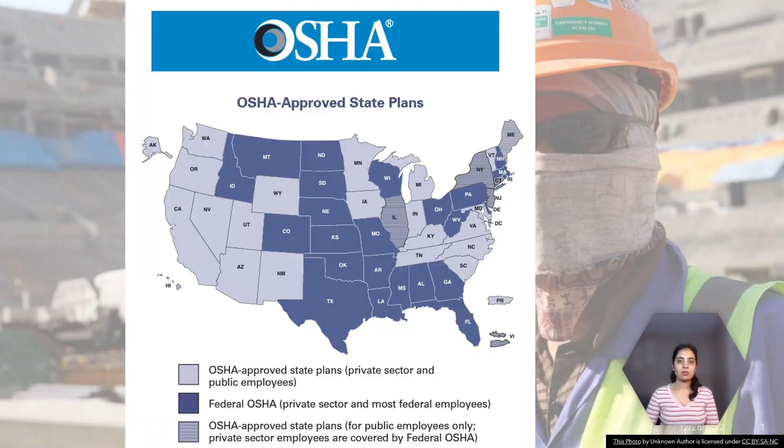In the previous video, we have seen important definitions in OSHA. In this video, we will see all the standards required for steel erection. So, let's watch today's video. OSHA safety regulations for steel erection, from the Detailing for Steel Construction manual by AISC and NISD, chapter 2, page numbers 2-12 to 2-17.

Today's topics: scope, tripping hazards, roof and floor holes and openings, column anchor rods, minimum erection bolts, double connections, column splice strength, column splice locations, perimeter safety cable attachments, joist stabilizer plates at column and joist.

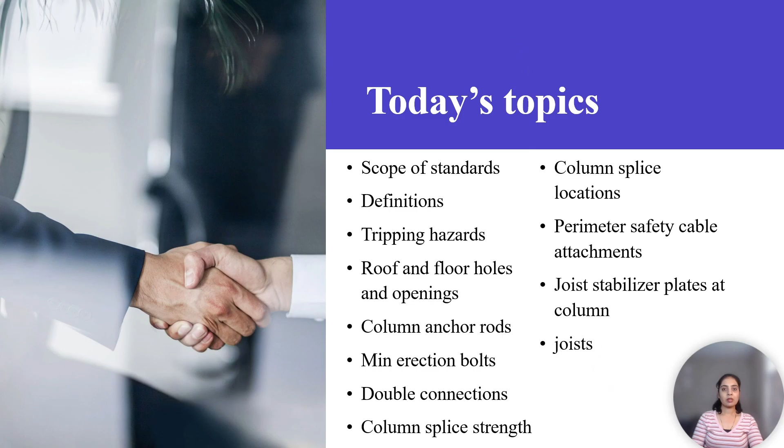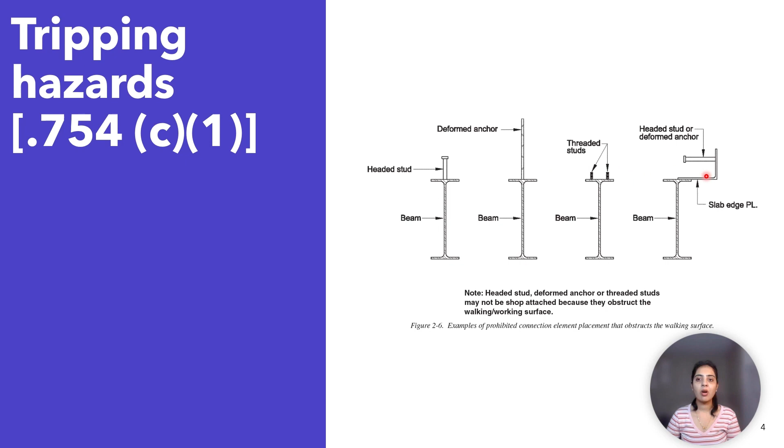The shop placement of shear connectors, weldable reinforcing bars, deformed anchors or threaded studs is prohibited when they obstruct the walking surfaces of beams or joists, as shown in the figure. The shop placement of threaded studs on column cap plates to receive stud joists, deformed bars on column webs, or even shear studs on beam or column webs is not prohibited, since these are not walking or working surfaces.

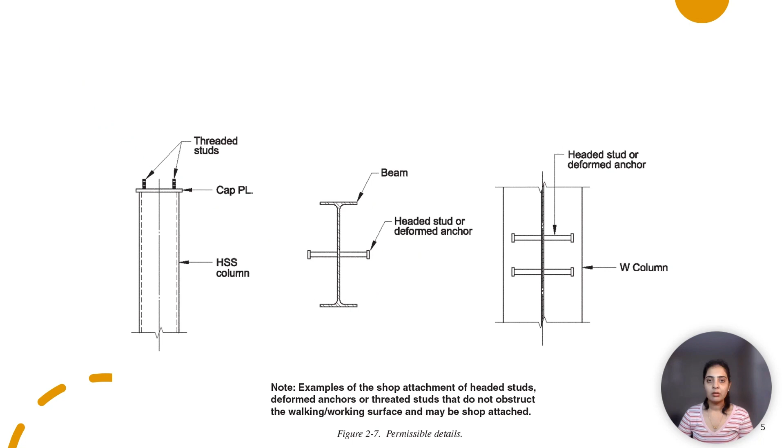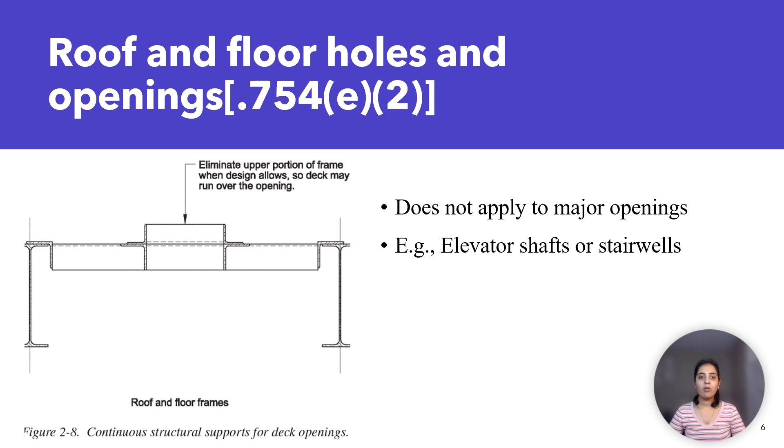Where design constraints and constructability allow, the structural supports for deck openings are to be fabricated so that decking runs continuously over the opening, as shown in the figure. This does not apply to major openings such as elevator shafts or stairwells. Other deck openings are not to be cut until the opening is needed.

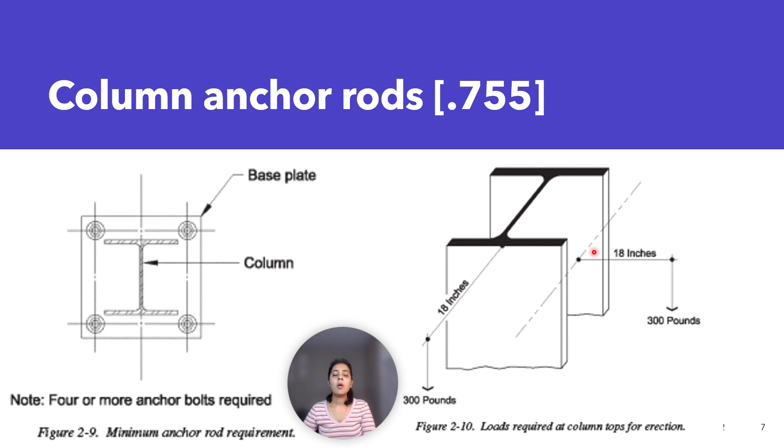Columns should have a minimum of 4 anchor bolts, and these anchor rods and the column foundation should be capable of supporting 300 lb of load at the column top located 18 inches from the face of the column flange, from a plane at the tips of the column flange, except for posts. Posts are not required to have 4 anchor rods. The structural engineer of record must design a column base plate and supporting foundation to accept the 4 anchor rods.

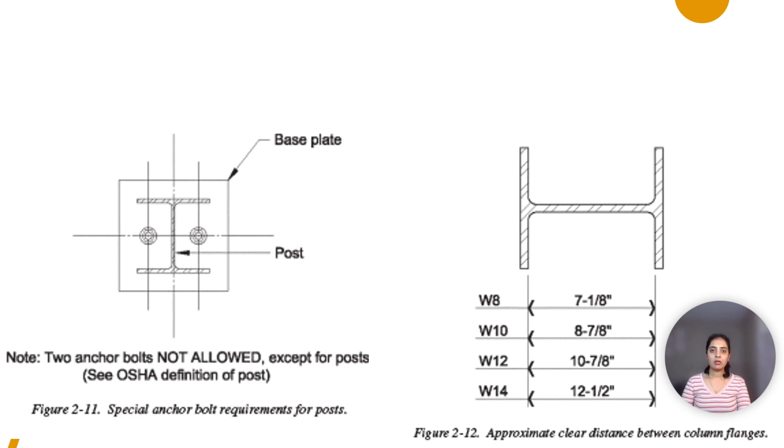In the erection of all columns, the erector must evaluate the job site erection conditions and factors such as wind, when the columns will be tied in, etc., and determine the necessity for guying or bracing.

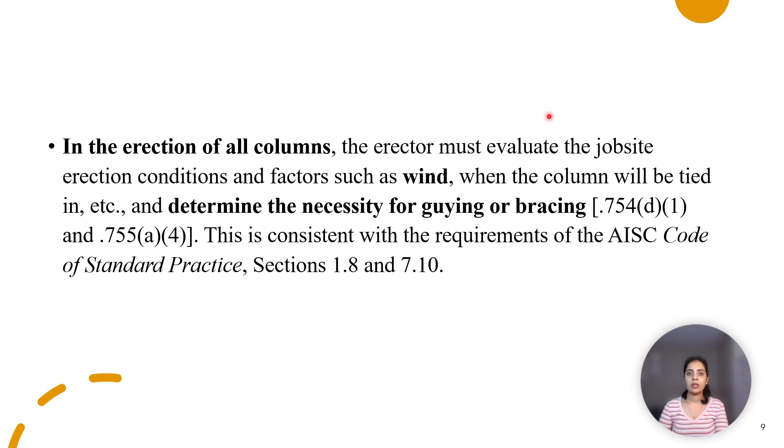Minimum erection bolts. The requirements given in the regulations are the minimum number of bolts to be used during erection to support a member until the crane's load line is released. Two bolts in each connection are the minimum to connect solid web members, and one bolt is the minimum for solid web bracing members, or the equivalent as specified by the project structural engineer of record.

The initial minimum bolts are to be the same size and strength as shown in the erection drawings. The erector is required to maintain the structural stability at all times during the erection process, and the determination of the number of bolts required to temporarily support members is a responsibility of the erector.

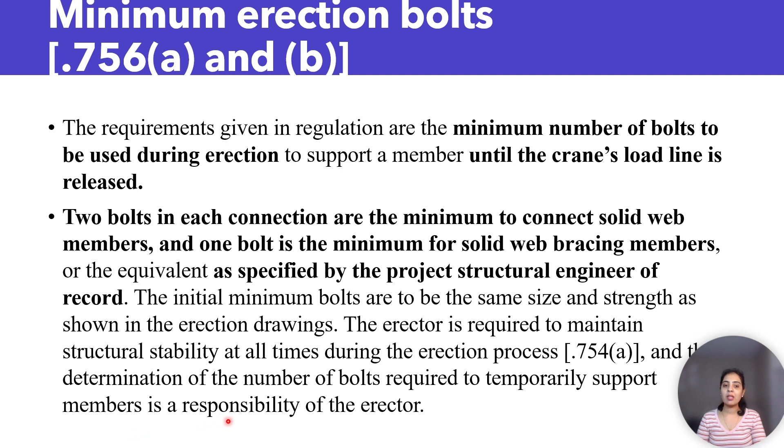Double connections. Only double connections of beams to column webs or to the webs of the girders over columns in the case of cantilevered construction are regulated. Not such connections at locations away from the columns, this boxes the bay with strut beams.

The rule is based on the fact that an erector commonly sits on the beam on the first side of the double connection, while the beam on the other side is connected in these regulated instances. If the connection gets away from the erector, beam and column collapse can occur and the erector may fall.

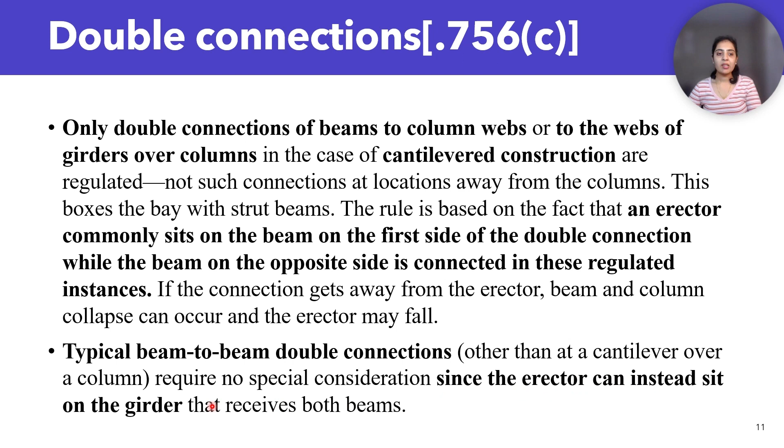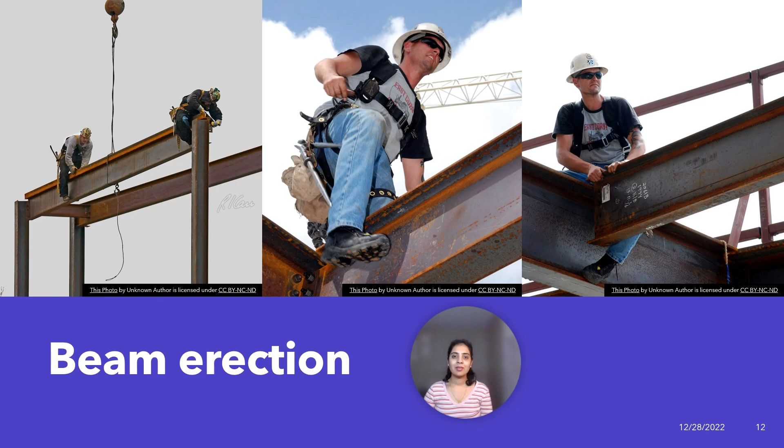Typical beam-to-beam double connections, other than at a cantilever over a column, require no special consideration, since the erector can instead sit on the girder that receives both beams. These are some images for beam erection. At column conditions, there are many ways to facilitate safe double connections.

The staggering of end angles on each side of the column web, single staggered, as shown in figure 2.13, may not stabilize the beam's top flange unless metal deck is present, and the angles may be better staggered on each side of the beam web, that is double staggered, as shown in figure 2.14.

So in this figure 2.13, this is the column web, this is the beam. This beam is erected first and this beam is erected second, and these are the staggered double connections on each side of the column web. So this is single stagger.

In figure 2.14, this is the angle on the far side of the column web held down one hole or clipped, and this is the angle on the near side of the column web held down one hole or clipped. This is the double connection staggered on each side of each beam web.

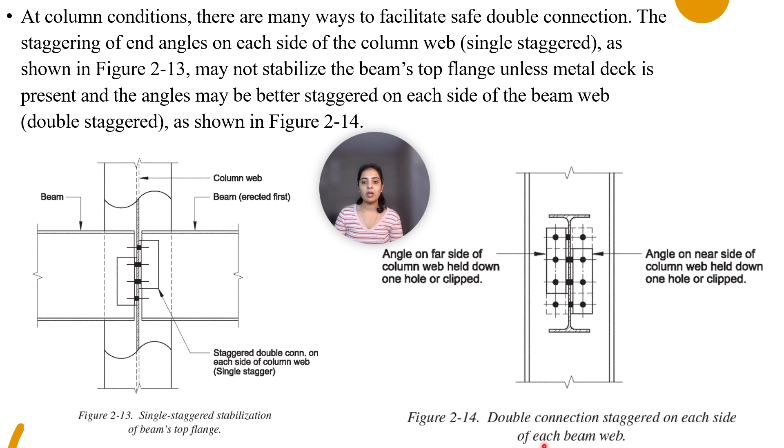When seats are used, the beam must have a positive connection to the seat while the second member is erected. The figure in the OSHA Standards Appendix H shows clipped plates where the end plates are used as shear connections. So in this connection, this is a double connection with the temporary bolted erection seat.

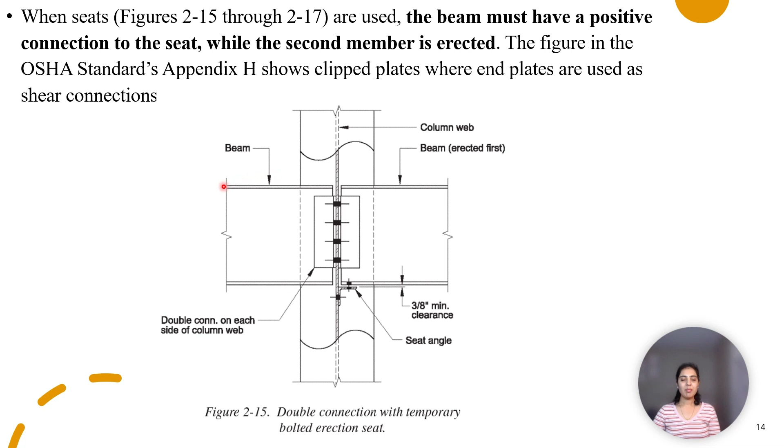So this is the seat angle used with 3/8 inch minimum clearance for the beam erected first. These are double connections on each side of the column web, and this is the beam erected second.

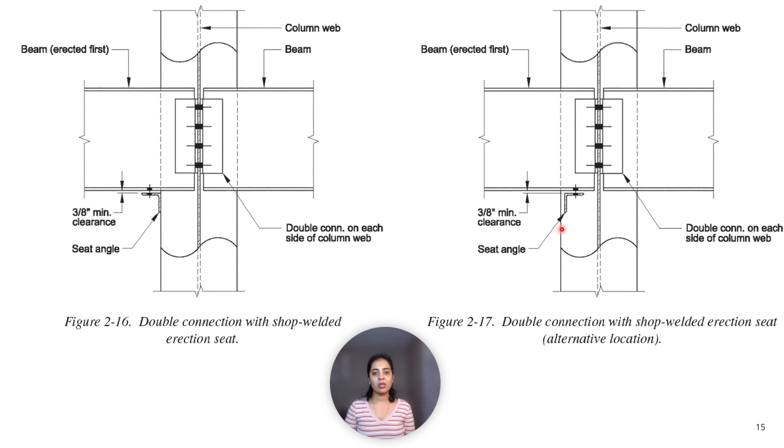This is the double connection with shop welded erection seat. So this seat angle is shop welded and field bolted to this beam erected first with a clearance of 3/8 inch minimum. And here this is the double connection with shop welded erection seat. This is the alternative location of the seat angle.

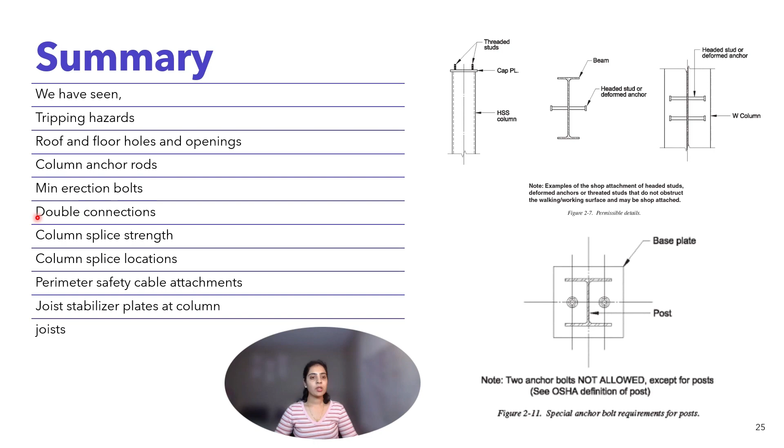Summary: we have seen tripping hazards, roof and floor holes and openings, column anchor rods, minimum erection bolts, and double connections. For the content in the video, all credits are given to the AISC committee who prepared the manual Detailing for Steel Construction. I am grateful to them.